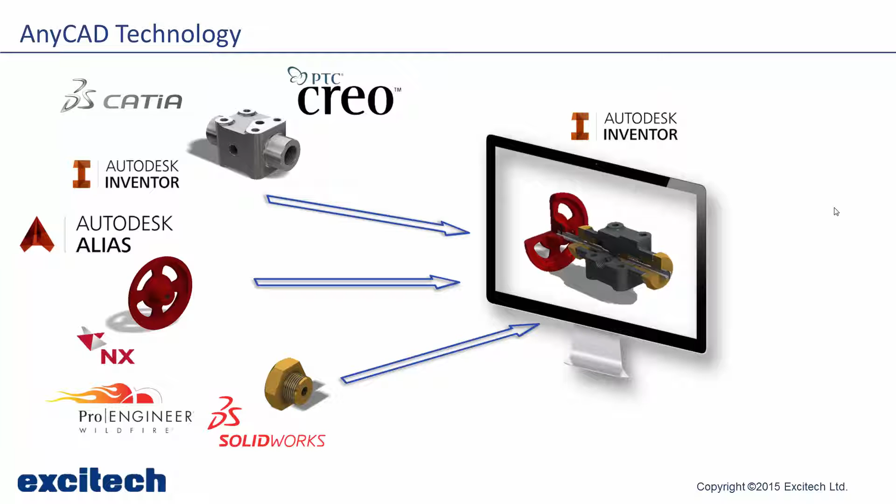So AnyCAD technology allows us to intelligently reference that data from the third-party MCAD tool directly into our Inventor assembly. If that component then changes, our Inventor assembly will update. Now, we've always had the ability to import data from some of these third-party MCAD tools, but it wouldn't, of course, have updated inside our Inventor session. So we now have that capability. And for the demonstration, I'll be using PTC Creo and Autodesk Inventor.

Okay, so here we are in Inventor 2016. Before we actually create a new assembly, let's take a minute to have a look at the new layout within our starting screen. This is now called the Inventor home screen, and you'll see it's split into three areas. We have the ability to create basic new templates on the left-hand side here. I could switch that to advanced quite easily with the little arrow here. All these panels are resizable as well, which is quite nice. We can also flip the arrangement of those panels.

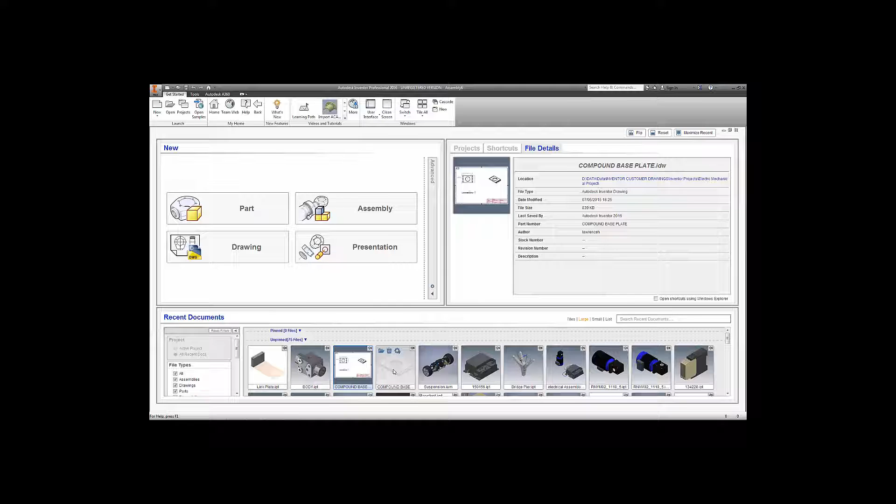On the right hand side here I have access to all of my projects, so I can make the projects active via here and also review the properties of these and actually add shortcuts into the projects. Something I really like is the ability to see the file details here of the selected component in the list here. That's quite nice, just to identify what folder path it's in, whereabouts it's actually saved within my system as well, which is quite good.

We can also maximise the recent file list, and you can see here we have all these recent documents as thumbnails being shown at the moment. We have the ability to pin some of these components as well, so if I start to pin them you can see it then keeps these in the pinned area here, and very much like a little folder system you can unpin, pin, roll these up and down and also filter information as well.

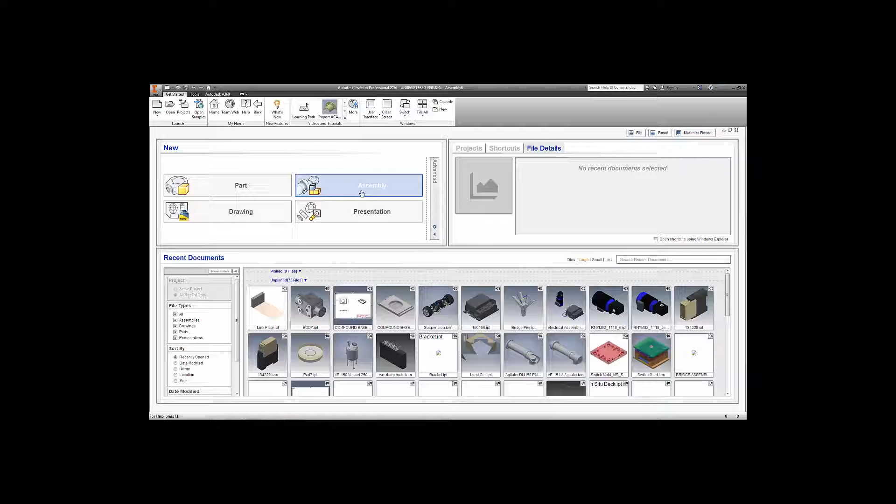Okay, so let's go ahead and create a new assembly. In this example we're going to place an imported CAD file in. So let's go and pick our Creo part and open this up. Now the new function here is of course the ability to reference the model through rather than convert the model. So I'm going to use reference here. I'm going to tell Inventor only to bring the solids through, and of course we can change our units in here. So I'll just say from source.

Okay, and that data is now referenced in. So here we have our Creo component. On the left hand side here you can see that if I right mouse click over the part I could edit the import, suppress the link which would stop it updating, or in fact break the link.

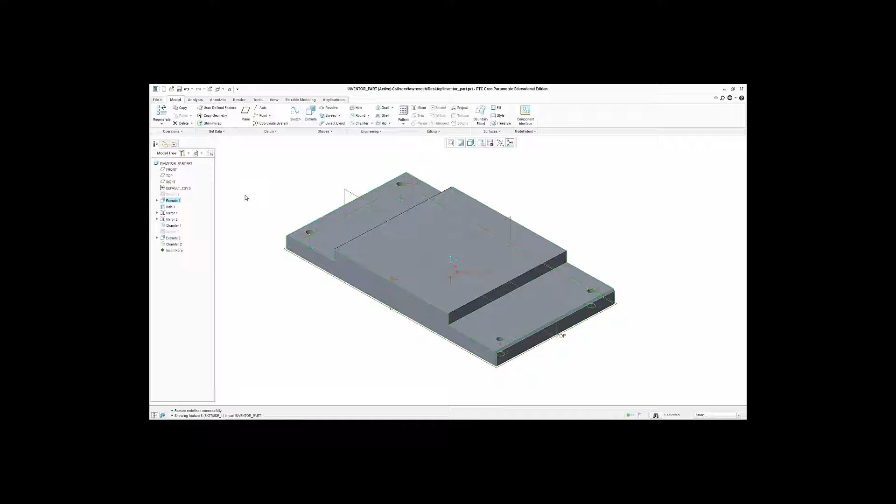Okay, so let's now go into Creo here, PTC Creo, and we'll make some changes. So we'll start by changing the extrusion height. Perhaps we'll just change it to there, say for example. Let's also change the width as well. So perhaps we'll reduce that to 250 there. Okay, we'll regenerate the component and save it.

So back in Inventor, let's see what's happened. Well, you can see I've got a strike of lightning across my PTC Creo part. That means it needs updating. So let's click the update button, and you can now see that Inventor simply updates that and references in the newly saved component. Okay, what about if I build some Inventor geometry off of this?

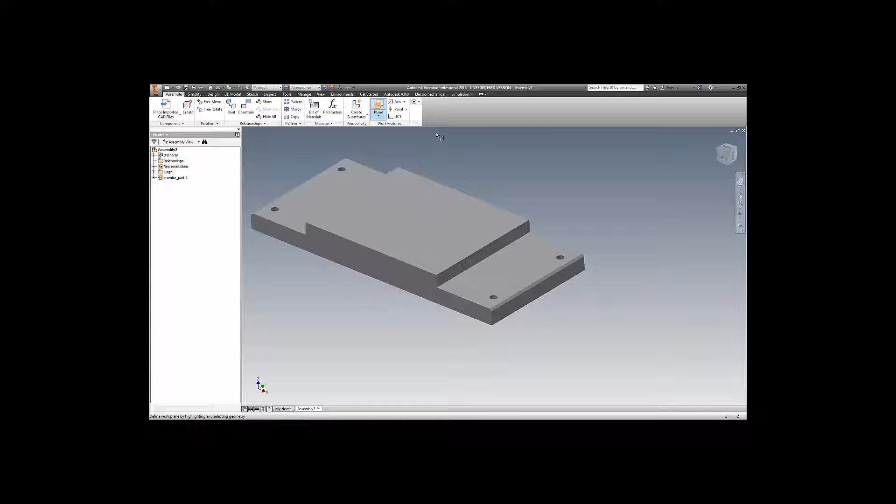So what I'm going to do now is build a work plane from it. So we'll have a work plane that's constrained to those two flat faces there, and we'll go through the process again. So let's go back into my Creo component in here. Once again, we'll edit the extrusion on this.

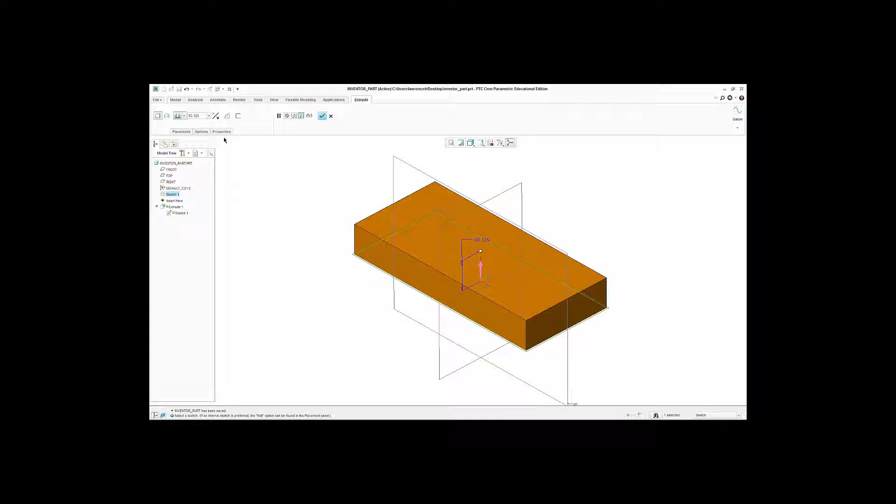We'll regenerate the model and we'll save it. Back to Inventor here and update. And of course you can now see that the work plane is updated as well. Now of course the significance behind that is if I then choose to build new features off of that work plane, those features will move as well.

So we can have a very intelligent system here where we can at will reference CAD data from other third-party MCAD solutions such as CATIA, SolidWorks, Siemens NX, ProEngineer, bring them into Inventor and then build my components off of that.

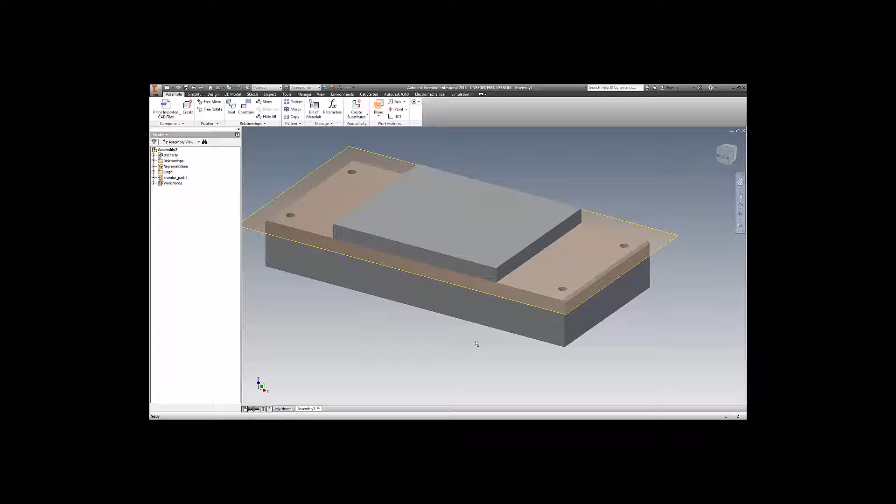How we've done this is we've actually associatively linked that DWG file into an IPT file, and then perhaps just use commands such as revolve, hole, sweep and so on to create the component. If we go back and change that DWG file by simply perhaps stretching or moving geometry and save that, then that would invoke an update within Inventor, and then our component will dynamically update. Okay, so let's now take a look at that in the software itself.

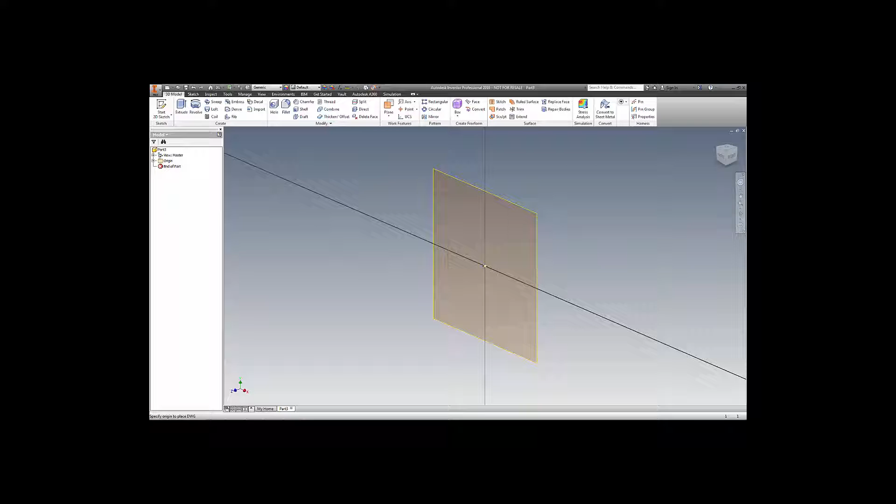So here I am inside Inventor, and I'm going to start by creating a new parts file. In here I'll go to import, and you can see we have a DWG file here, so I'll go ahead and open this up and I'll place this onto the XY plane and just choose my origin. Okay, so you can now see the dialog here is telling us that this is going to create an associative underlay, and if I want to make use of the geometry I can project it.

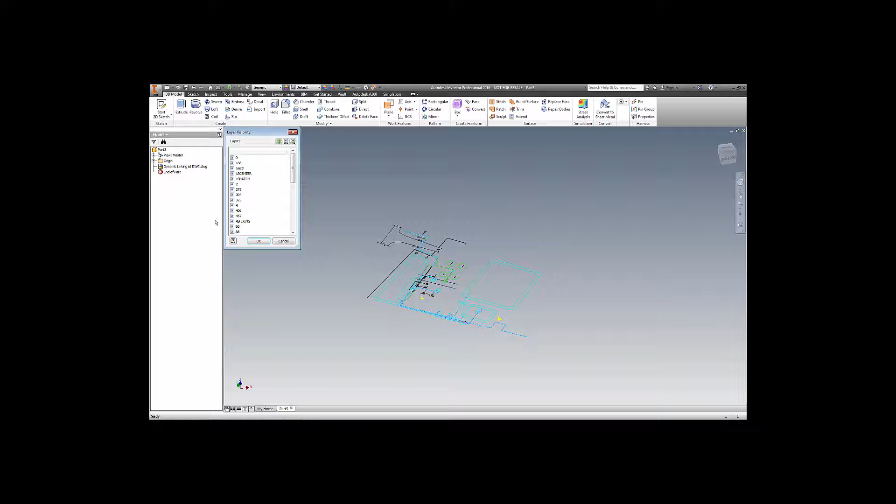If we take a look at the browser here, you'll notice that we have the DWG file linked in there, and if I right mouse over it, you'll notice here I could suppress the link, I could break the link, or indeed I could control the layer visibilities if I wanted to adjust the layers. So in this case I'm going to make use of a new tool that enables me to project the data through. So you'll notice up here we have a completely new command called project DWG geometry. In this case I'm just going to project off the circles that are representing the vessels.

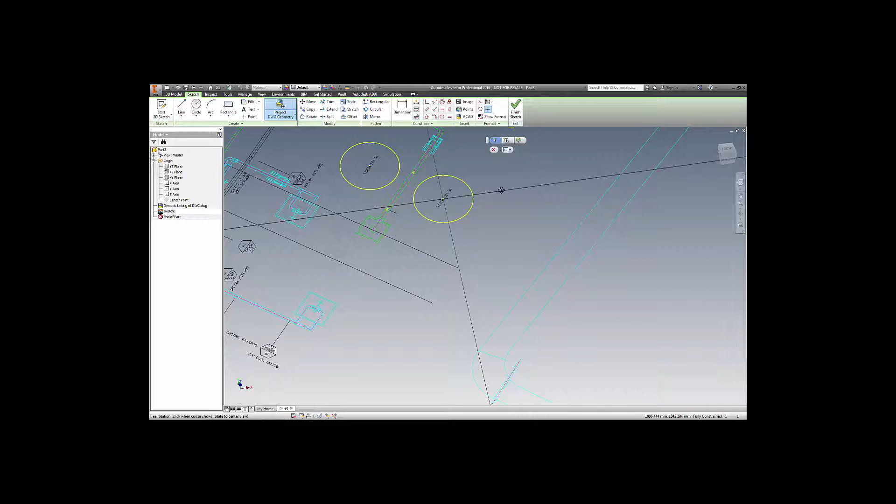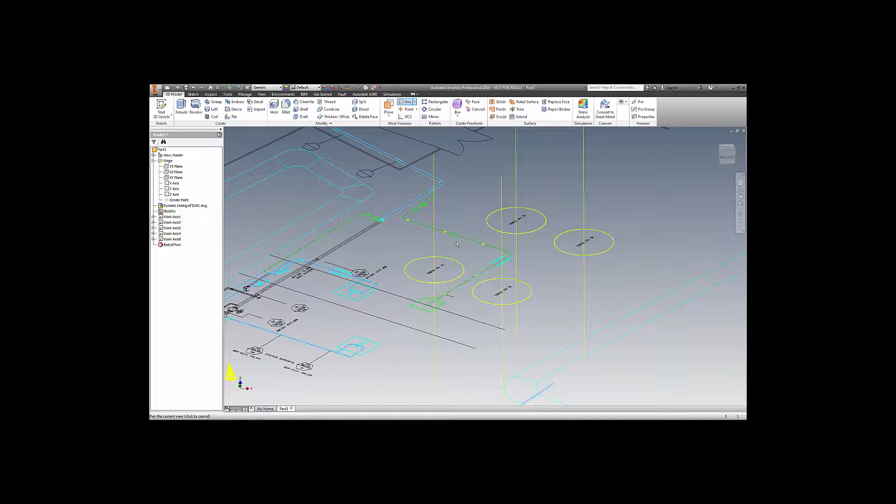We'll now create some work axes through here as well. So I'm just going to associate these back to the XY plane in here. Yeah, we'll go through and create those work axes. Okay. Right, so at this point we'll save the drawing away. So let's click on save. Okay, and this one's going to be called vessel layout.

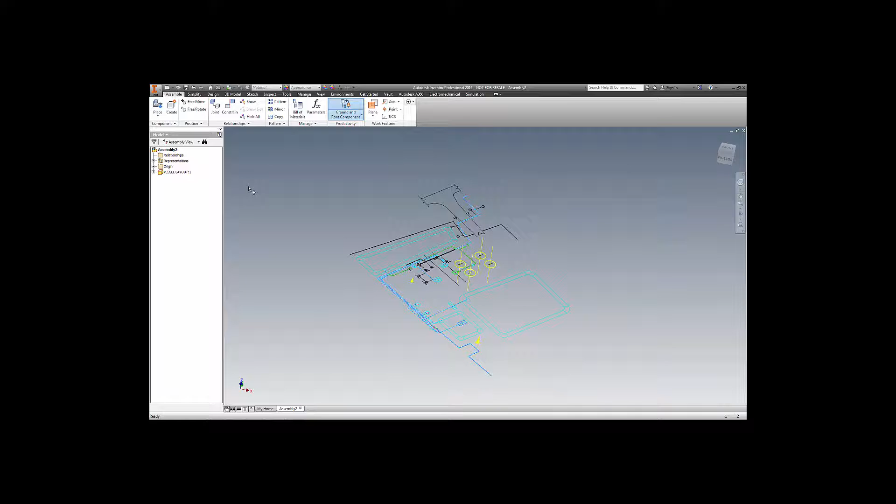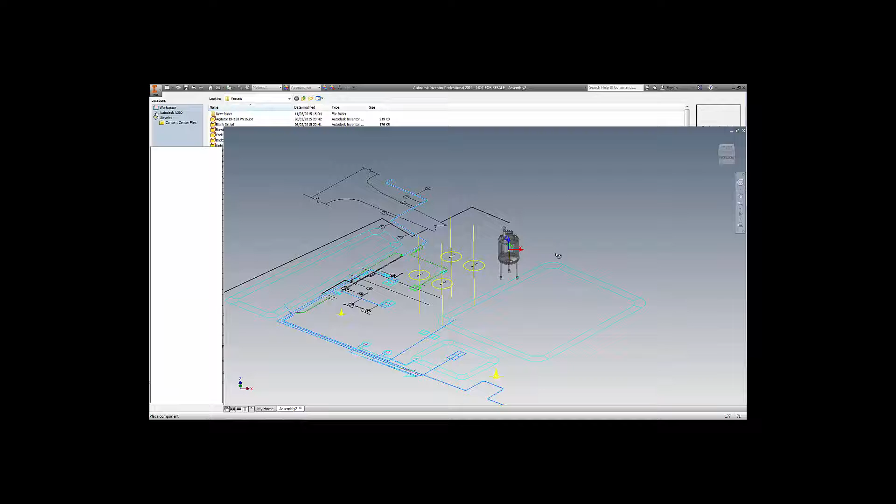Okay, so now we'll generate a new assembly file and we'll place in the data that we require. Let's just come up a few levels here. So there we are, a vessel layout. Okay, we'll place the part in and I'm going to ground and root this. So at this point, let's now go ahead and place my assemblies in. Okay, so what we need for these layouts here is basically the vessel, and we'll bring this data in. Okay, we'll just drop 4 of them around there.

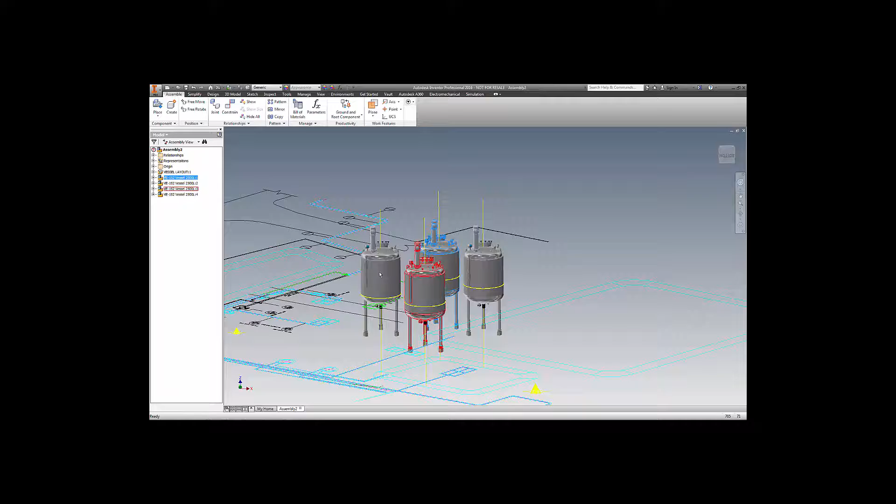Now what I'm going to do is constrain these to the work axes. So we'll just go around and constrain all these vessels in here. I'm not going to worry too much about the vertical placement. Just for this demonstration we're going to look at literally just a physical placement of these in relation to the DWG file. So maybe that's the vertical height for those.

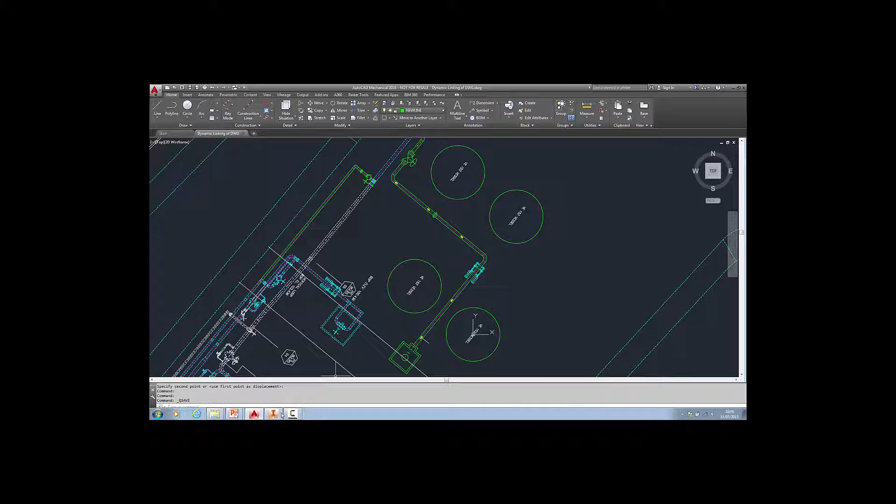If I go back to the AutoCAD file again, and once again move these vessels back to a slightly different location, like so, hit save, back into Inventor, you'll notice we get the strike of lightning, very much like we just saw with AnyCAD, and then of course I could update this here. Click on the return button and instantly that updates my assembly.

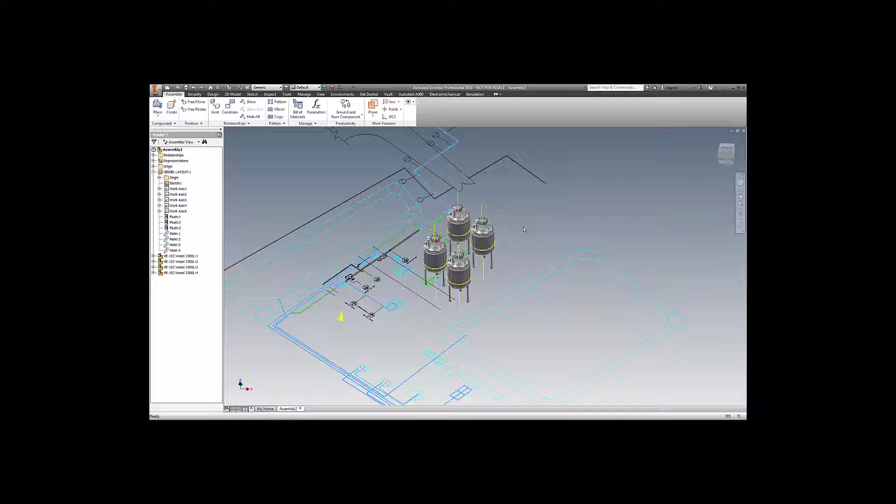So as well as driving component models with this, I see a much bigger use for this with creating assemblies. So what we'll be able to do is use a flat AutoCAD drawing as an underlay and have that linked to our physical Inventor components.

Okay, let's now move into the drawing view enhancements. So we have a few new enhancements here. First thing we're going to look at is the drawing views dialog box and the dynamic way that we can now move and scale views and also orientate views to place down onto a drawing. We'll also look at some of the new symbology that we can use whilst editing a dimension or creating text within an IDW file. And lastly, we'll look at the revised ballooning tools.

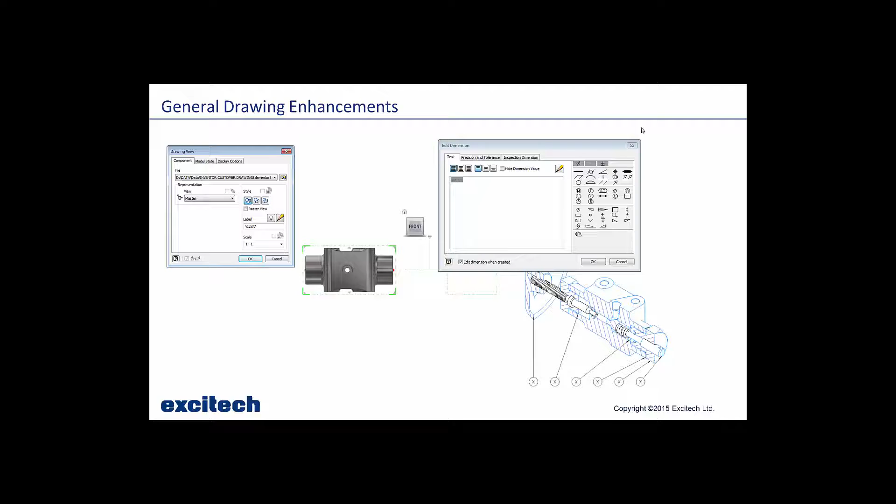So let's go into the product itself. And you can see we have an assembly of a valve inside here. And we'll go directly now into creating a drawing of this. Okay, so if we now click on the base command, first thing you'll notice is that we have a frame around the view, and this has dynamic glyphs on it. So I can use this to drag the scale, and it's snapping to default scales.

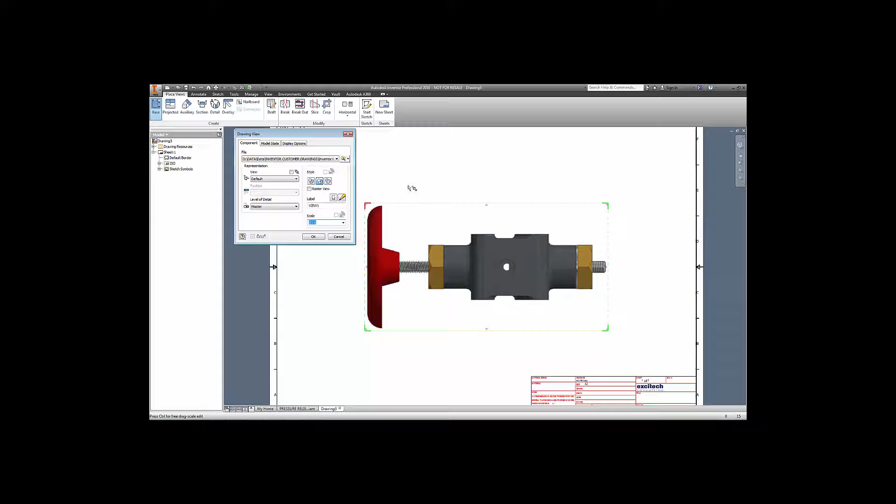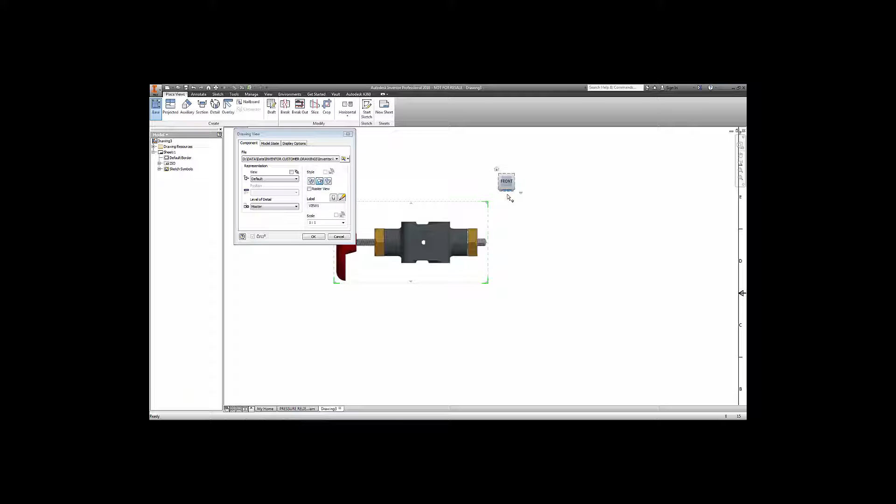We can also use this to project views. So as I move my mouse over here, you can see that Inventor is going to project a view directly above that view that I've got at the moment or below. We can also use it to move the view around just by dragging. Now, the other thing you'll notice up here is that I have the ability to use the view cube whilst creating these views. So for example here, if I wanted a plan view over the top, it's nice and easy to use the view cube to get that orientation.

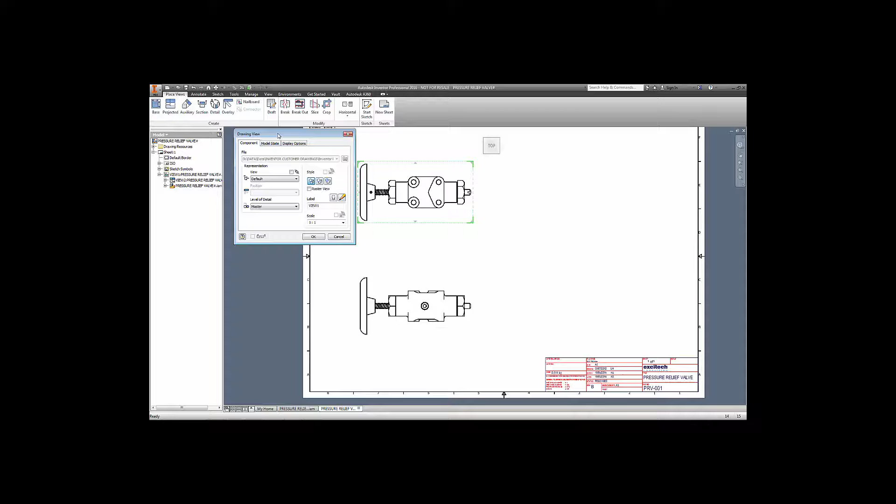So let's go ahead and place a couple of views out. There we have it. And what we'll do here is we'll also create hidden detail lines in here. Notice we have new icons in here, so this box has had a little bit of a makeover as well, which is good. Okay, and what we'll now do is we'll create a new base view up here, which is going to be an isometric view. Okay, so there it is, and again I can scale that quite nicely through here and place that where I want.

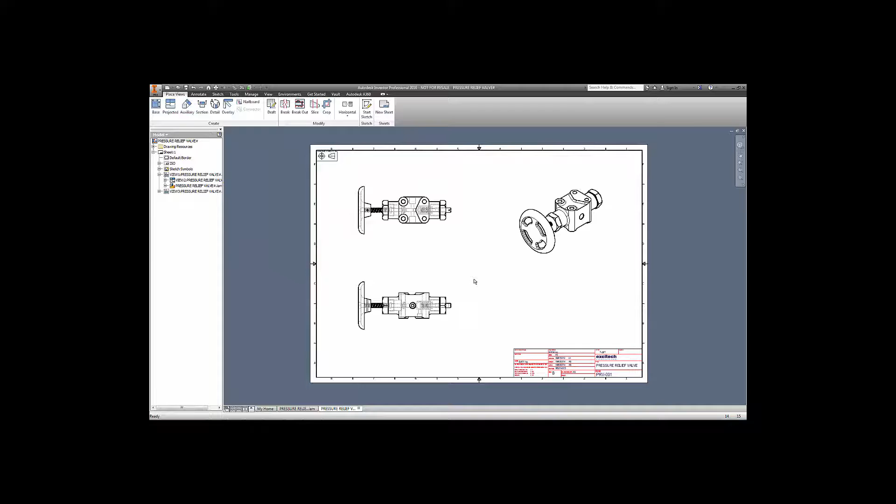Okay, so let's now have a look at some text improvements. So if I get an overall dimension across this, from there to there for example, as I place the dimension down, you can see that we have many more symbols that we can now make use of.

We'll also now have a look at the revised ballooning routines as well. So first up, I'm going to create a parts list that we'll place down onto the drawing. And now we'll create some balloons. So if I go to the auto balloon option here, one of the things to look out for here is you'll notice that we can now use our own user-defined symbols for balloons. That's quite a nice option.

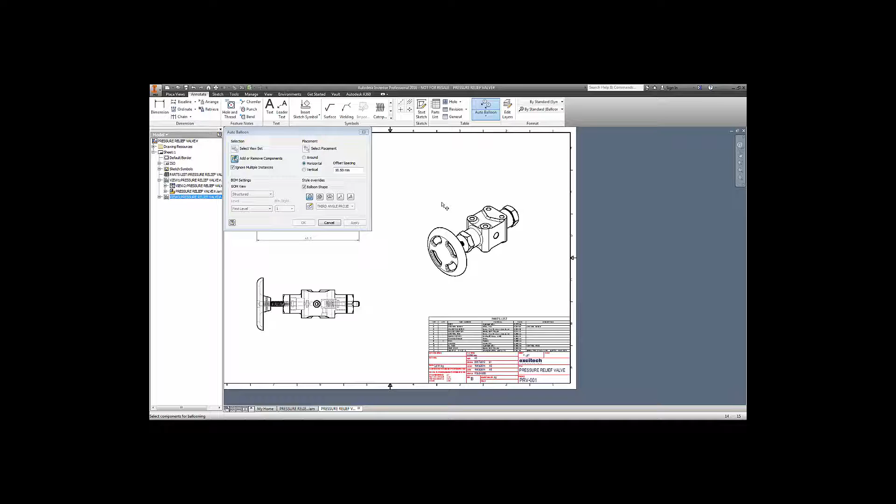Also, you'll see here that if I select this view and all the components within it, and now ask Inventor to place out some horizontal balloons, what it's going to do here is try and find the closest point on each component as a reference. In previous releases you might have found that the reference arrow here went all the way through to the back edge of the part. So that's quite nice. Okay.

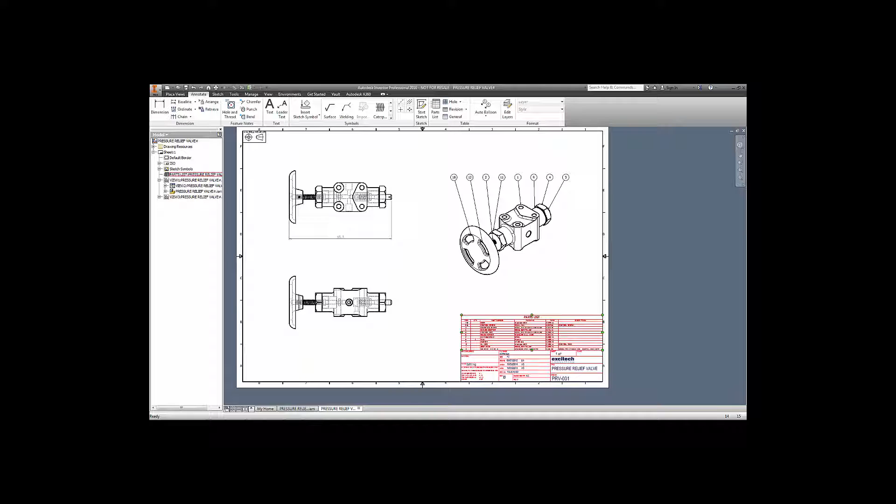Let's now take a look at some freeform modelling. In this section we're going to just take a small look at some of the enhancements made to the freeform shape creation. So for this example I'm going to create a new chair back and also a new chair seat. We'll see here that Autodesk have completely revamped the ribbon across the top here, and you can see that we have many more panels on there and quite a few new commands. So the best thing to do is just get in and start to show you that in action.

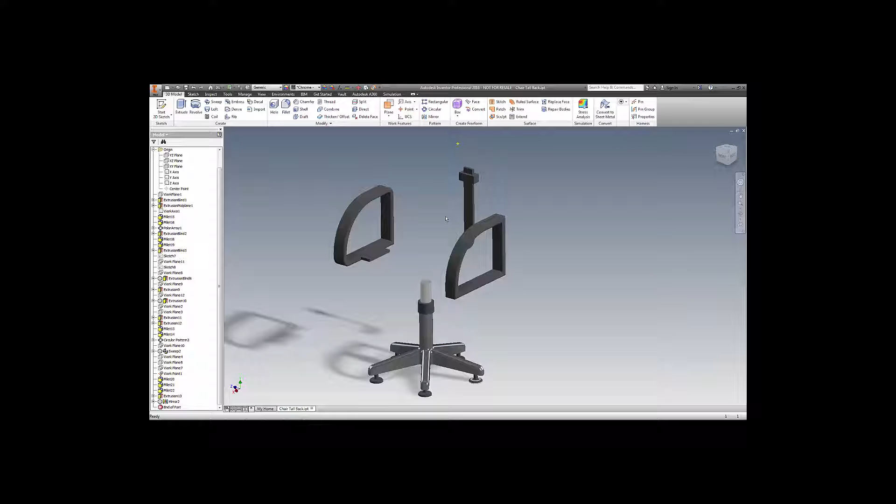So here we are inside Inventor, and you'll notice I have some basic components of the chair modelled. What I want to do now is just start to explore some basic ideas for a seat for the chair and also a back. So here I'm going to start with the box command. I'll pick a location where I want this to start and just place a box down.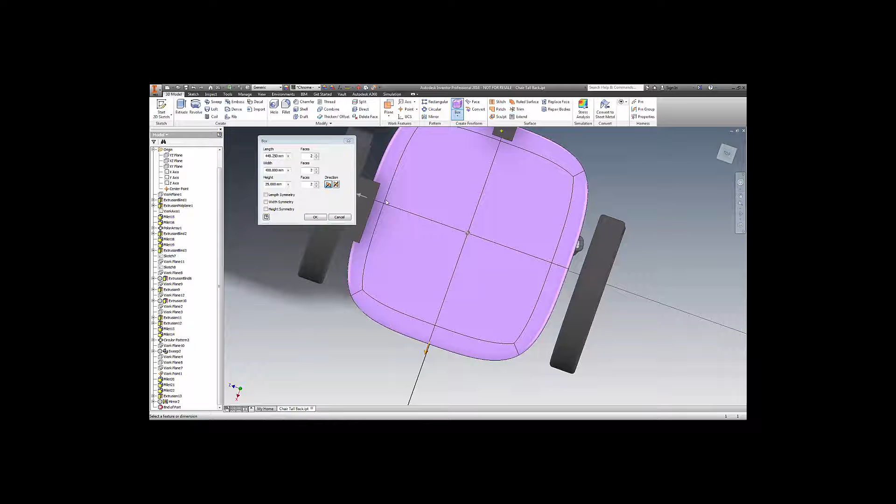Now at this point I can just start to stretch this data around just to get a rough idea of the concept. So that's a little bit too big, so we can stretch that back a little bit there. I'm quite happy with the width of that. So let's now stretch up the height.

Okay, we'll go a little bit more than that. Okay, that looks fairly good. So we can now increase perhaps the face count a little bit here. And we can also put on some symmetry. So here I'm asking for width symmetry.

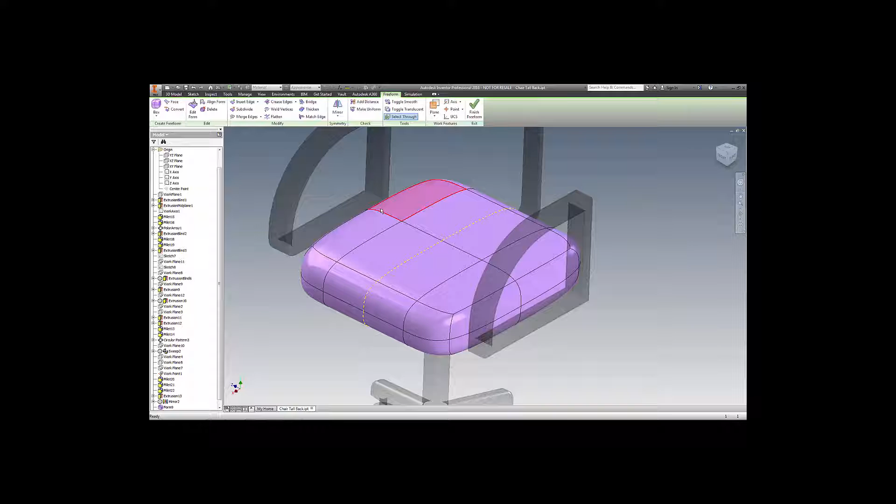Right, so at this point we can now start to edit the form. So in this example, you'll notice here we have various different filters to allow me to pick points, edges and so on. So I'm going to pick an edge here. Notice I only have to pick one side because I've selected symmetry across the centre of this. And of course now we can start to pull this around.

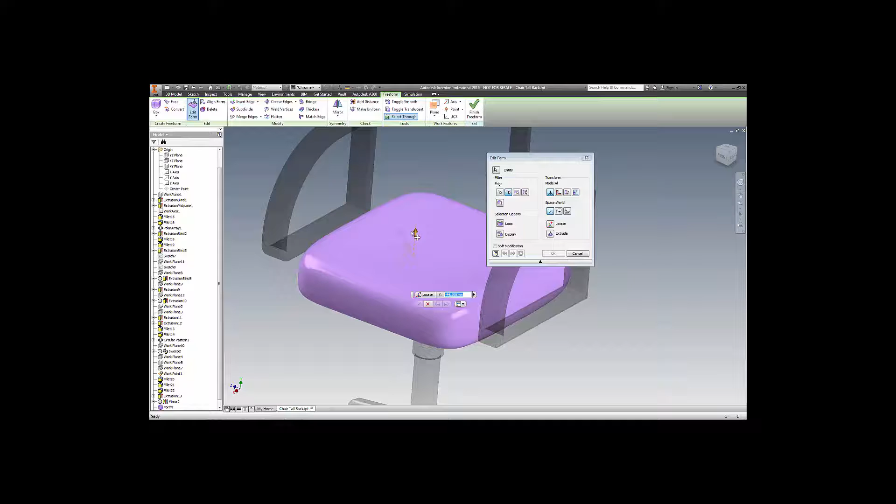So let's have a slight depression into the seat there. And what I'm going to do is angle that depression back. So you can see as I pull the rotation around, what that's actually doing is rotating that edge there. Now, probably to be a little bit more successful than that, what I'd probably rather do is perhaps pick the pad faces themselves. Now, to do that, I'll probably want to subdivide these a little bit further.

So I can go to the subdivide command. Yeah, we'll pick a face there, and also we'll subdivide this face here. Good. So now we'll select these two faces here, and again we'll go back to edit form and we'll pull this down just as we did before.

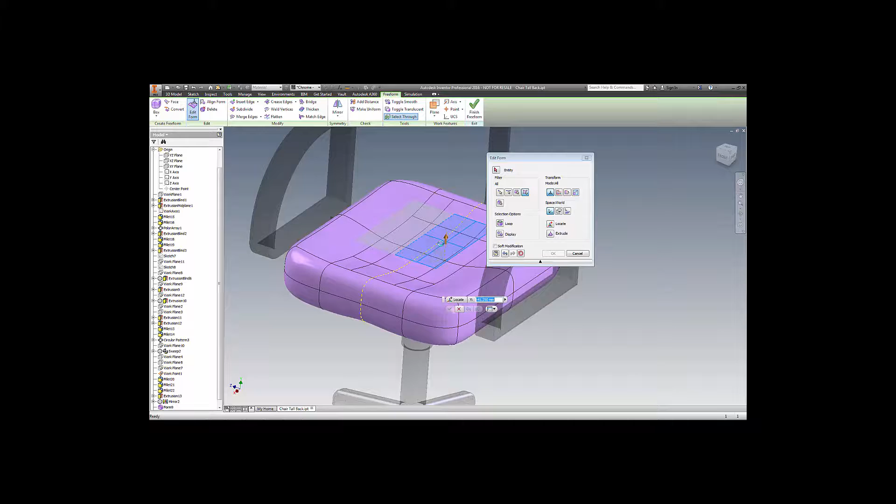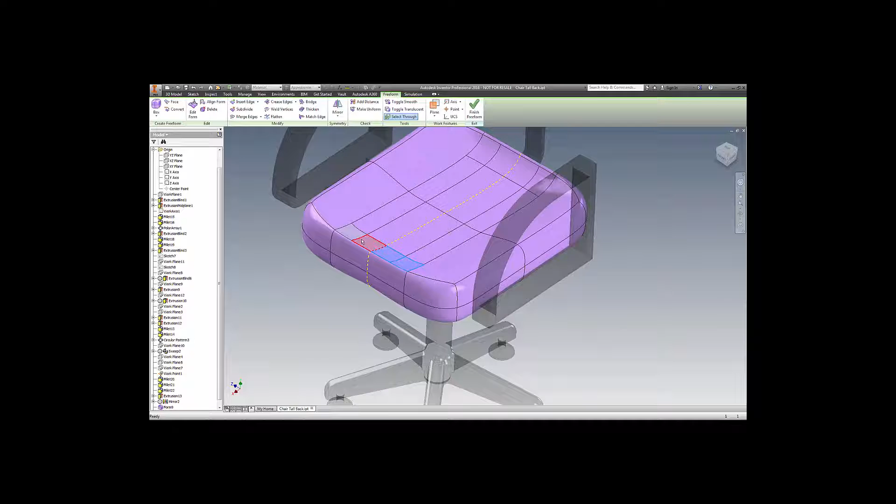Now this time what I better do is rotate. So you can now see I can rotate that around. Yep, let's just get that looking about right there. So we're going to have a nice sort of deep seat towards the back there, which is good. Okay, now we'll make sure that we have a nice area for our sort of legs to fall through.

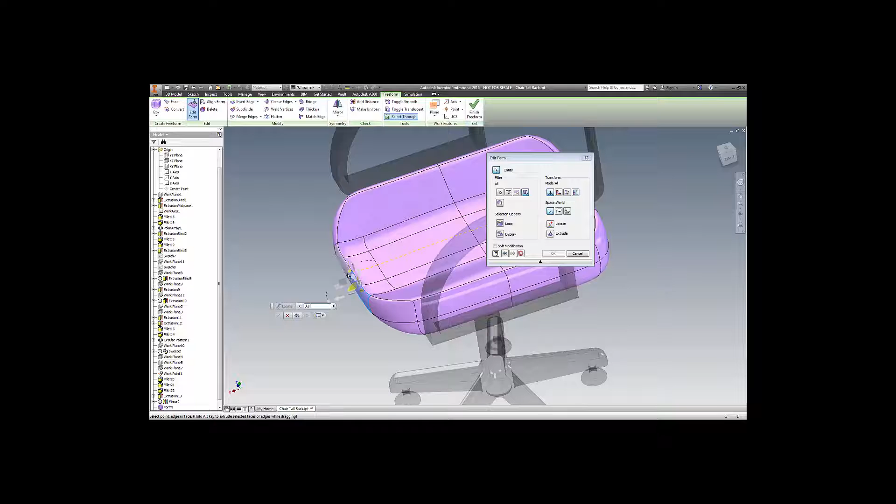So again, we can edit the form here. Yeah, we'll just slender that down a little bit there. And perhaps what I'll do here is I'll just extend that out just a little bit in there. Let's pull that a little bit further there. So you can see this is all very conceptual at the moment.

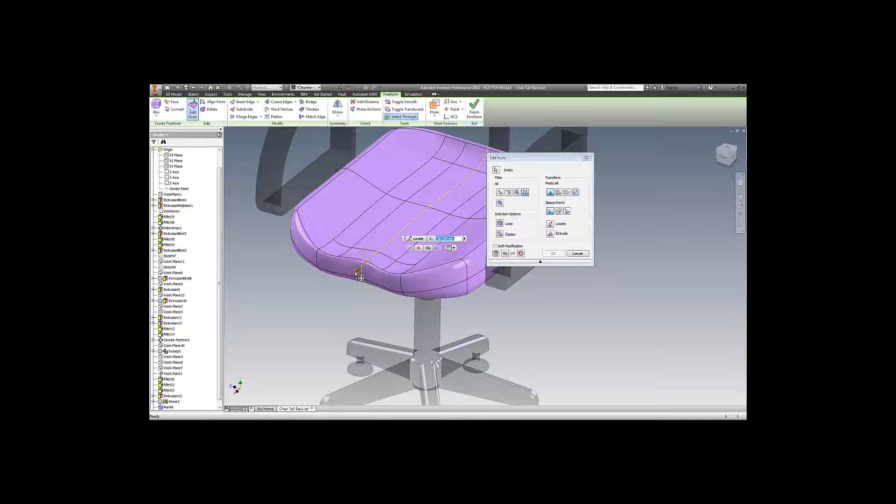Okay, now what I'm going to do is, again, just edit this edge back a little bit here. And we'll take both of those edges there. And we'll push that somewhere like that. Okay, so fairly happy with that at the moment. Again, we can come back and fine tune that a bit later on. So we'll finish that form there.

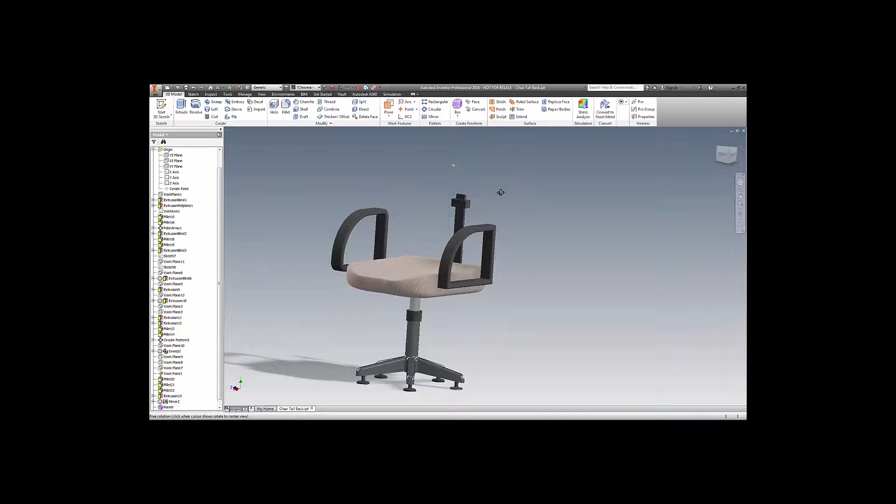And again, here we can assign a material to this. So let's go through and make that chair, for example. Okay, so there's the seat for the chair itself. So let's now go and create the back of the chair as well. So again, we'll start off with the box command. We'll pick a position where we're going to start this.

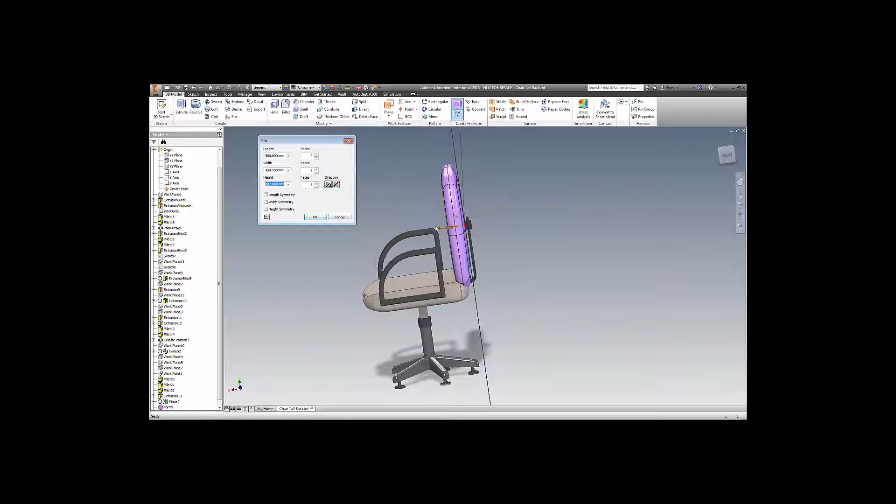And once again, I can start to just pull this geometry around to get a rough concept. Okay, so that's looking okay at the moment. Again, we'll create slightly more thickness to this. And once again, I would like some symmetry. Good, so there's our area ready to start.

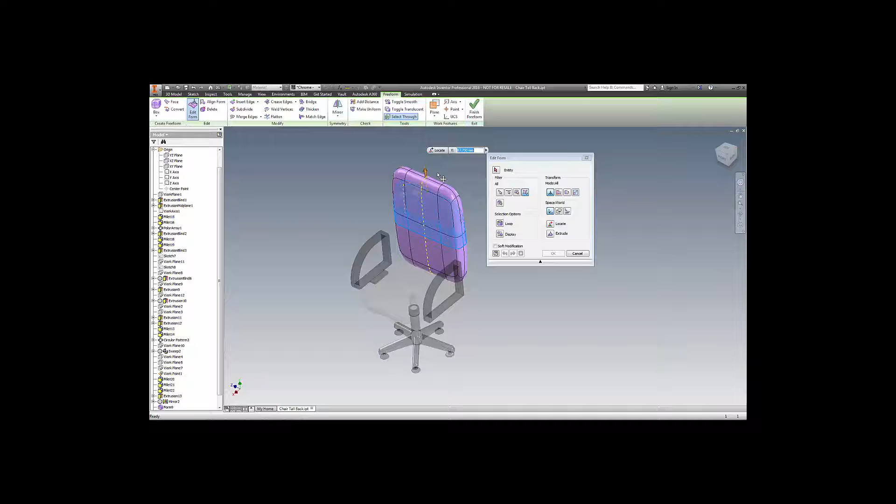So now what I'm going to do is just start to pull this around once again. So you can see now I've just been able to use a very simple window selection set there to pull that around. So we'll go for something like that. Here, what I might want to do is start to pull this around a little bit as well. So I'm going to have a little bit of an area where that's coming back there.

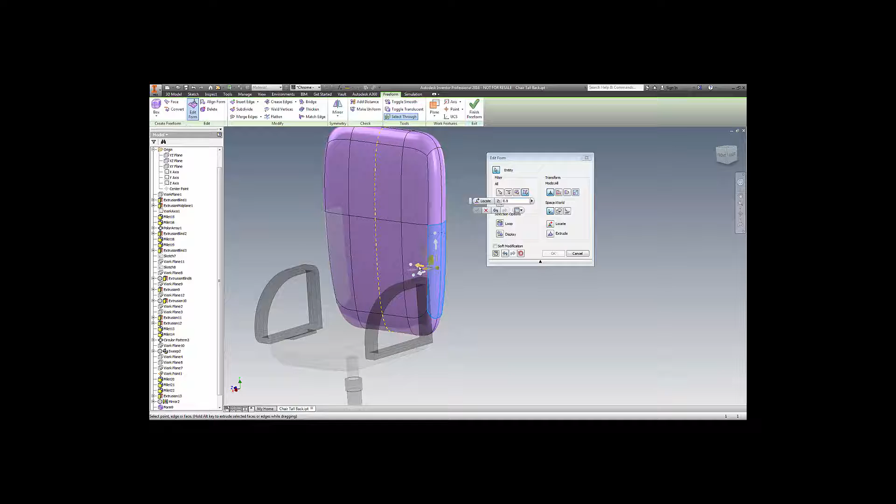Let's now come into here, pull that a little bit further like so, and then right down the bottom, let's just make sure we select the bottom faces there. We'll pull that back a little bit. Okay. Perhaps what we'll do is we'll increase the width of the chair up the top here a little bit as well. And we'll narrow it down to the bottom. Yeah, just squeeze that in a little bit.

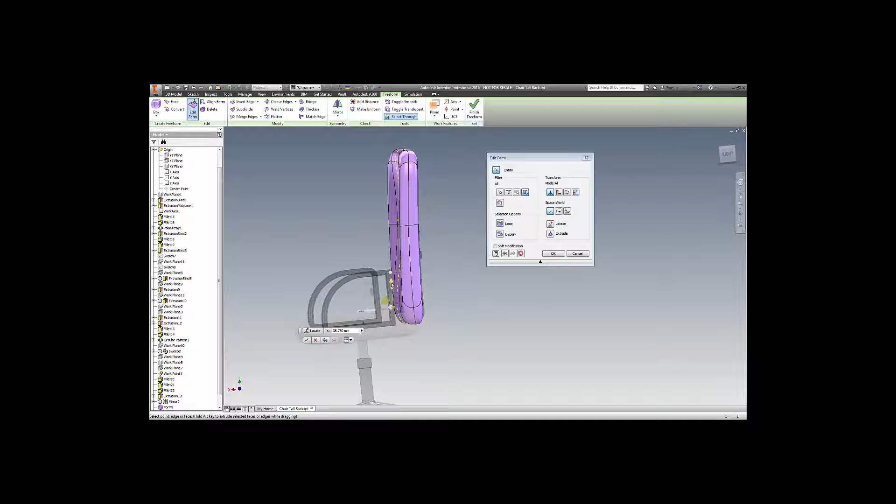Yeah, and we'll take these edges back in, perhaps like that, and these edges can come out to give us a bit of lumbar support. Okay, so again I can add my material to that. Yep, so this again will be the chair material there.

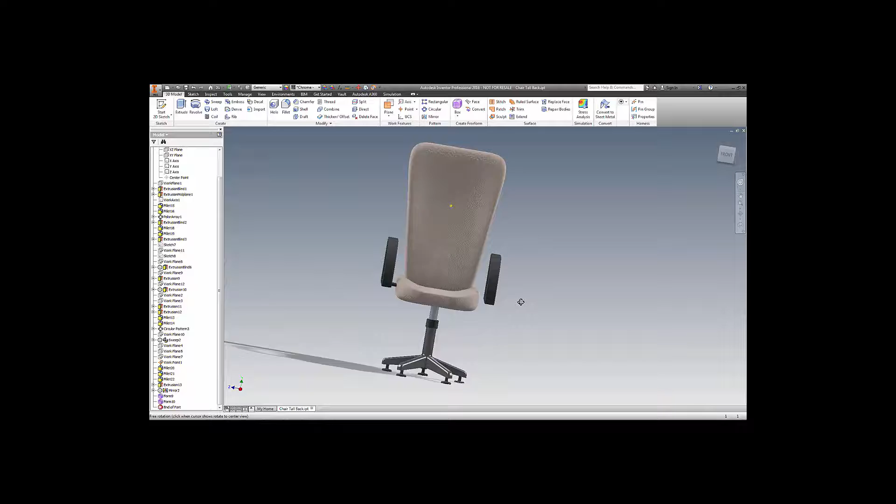Okay, now again at this point, if I look at that, I think, well, okay, the back is probably way too big. So of course we can go back and edit this very easily. So if we just do some edit freeform on here, we can go back to being able to reduce the height of that very simply, like that.

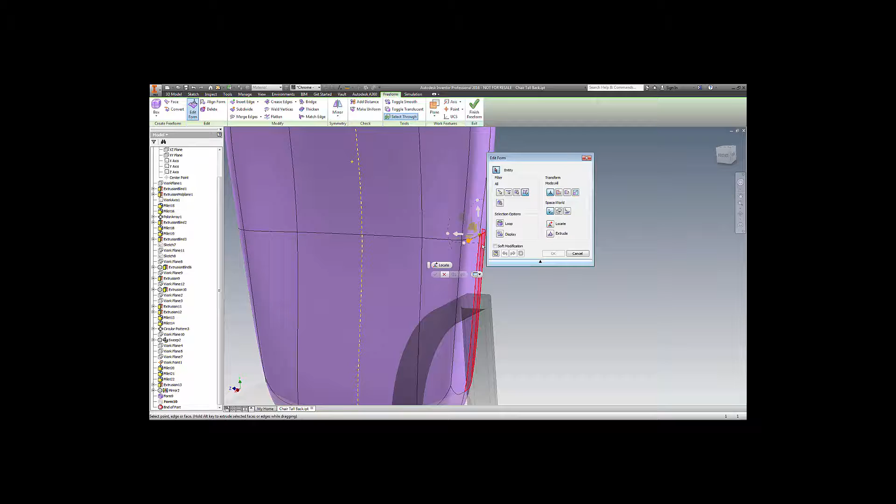Perhaps I want to pinch in these edges a little bit there as well. So what I'm going to do in this case is use the point there, just to pull that back in. Yep. And then perhaps we'll take the whole edge this time.

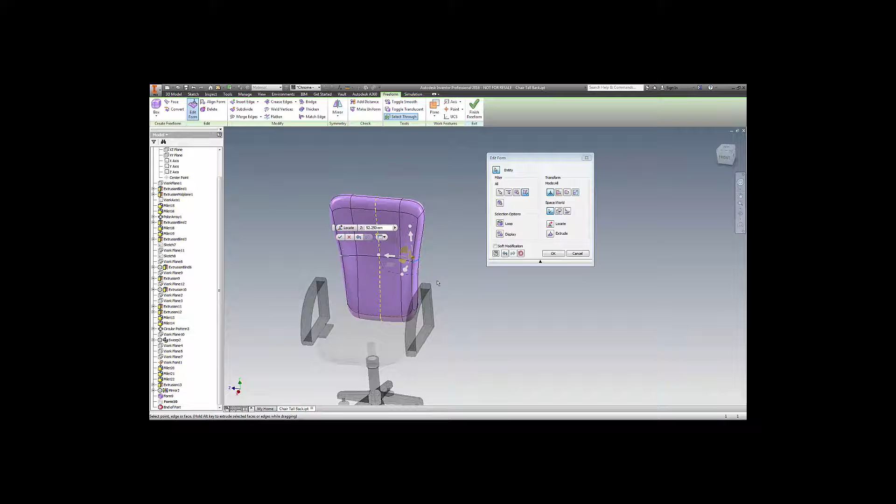So we'll select those two edges there, and again you can see I can squeeze that in. Now as we start to squeeze this, you'll notice also that we can have a soft modification in here as well. The sort of thing we can do here, it's very easy, just play around with these slider bars to get a much nicer blend between the components that I'm using there. Okay, so that looks quite nice.

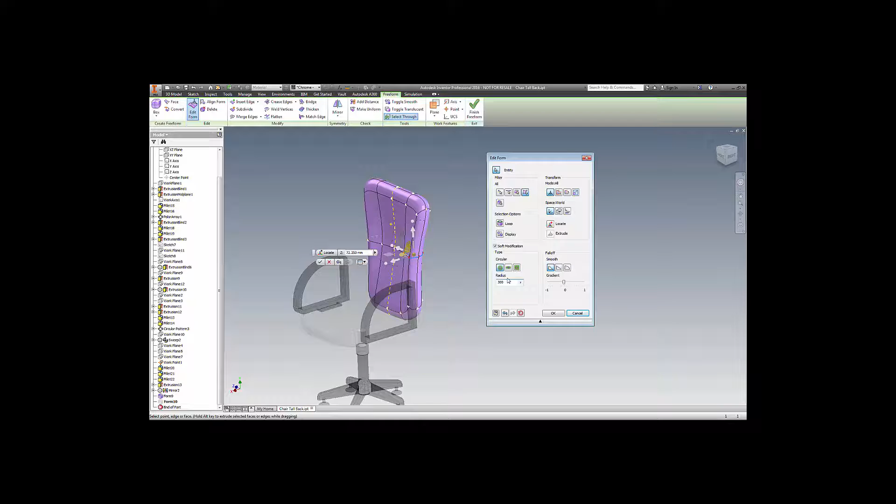Again, I could set an accurate radius in there if I wanted to, so perhaps we'll go for a slightly smaller radius in there. Yep, and we'll come out with that modelling tool. And there's my conceptual chair.

Okay, let's take a look at the sheet metal enhancements. There's been a few sheet metal improvements in this release. One of the major ones is the ability now to use multi-bodied solids within the sheet metal workflow.

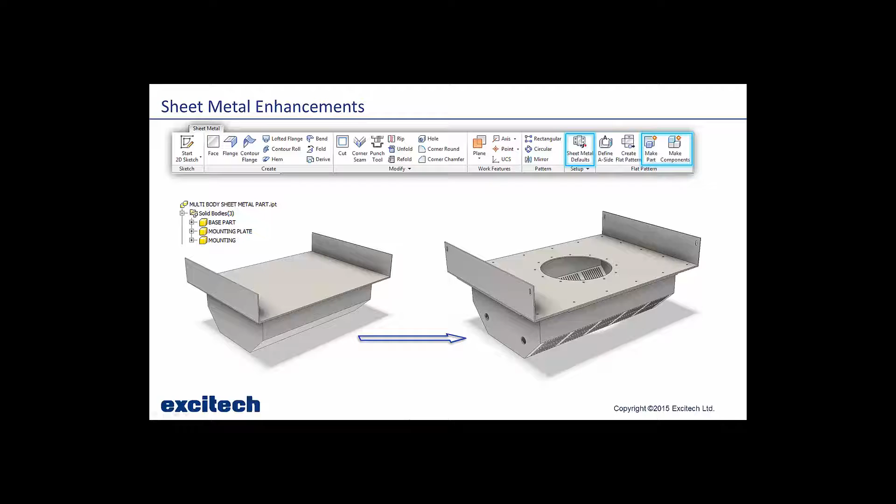Okay, so here we are in an IPT file. If we take a look on the left hand side of the browser here, we'll see that we have the multi-bodied solid and we have the 3 separate solids that I've created here. And if you look at the workflow, it's fairly straightforward, just solid modelling.

So the first stage here is to convert this into sheet metal. As soon as I pick this, you'll notice Inventor then invokes the sheet metal defaults command. So I can pick on any face here, and you'll notice now it actually pulls the thickness through from that particular selection.

So once I've done this, I can now start to process these components into sheet metal parts. So let's start with the mounting plate here. What I'm going to do is just turn the visibility of these components off. And we can now use traditional sheet metal tools to start to rip the corners out here, so we'll grab that corner there and rip that out, this one here.

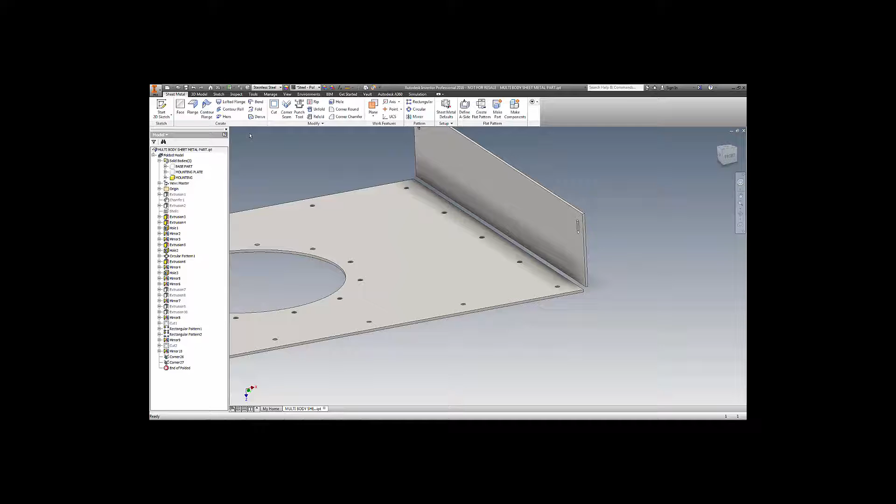Then we can put bends in as usual. So let's start with the flange here. Now another nice change is the ability to have a 0 bend radius, so that wasn't possible in older releases. So let's do a 0 bend radius in here. Okay, and there's my first component done.

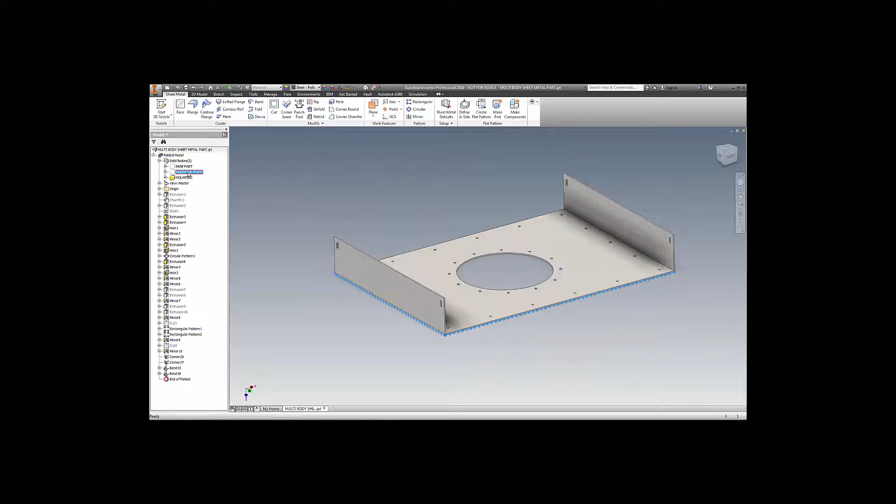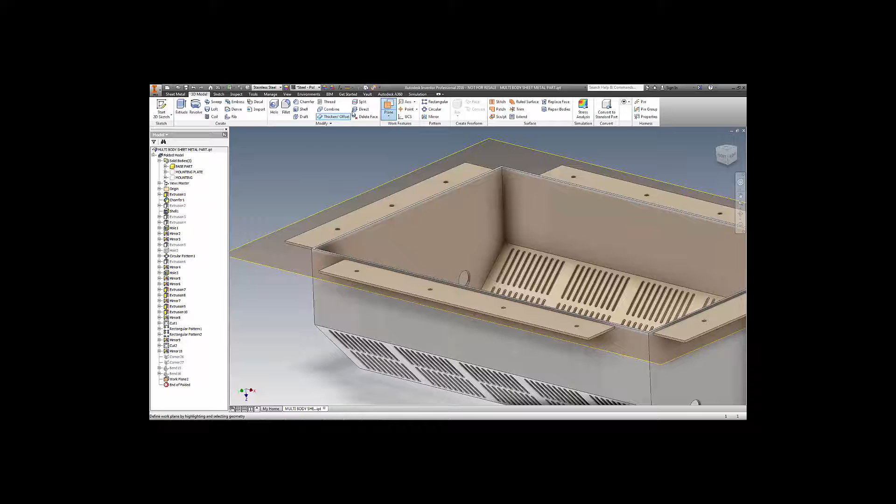So we'll now move into the next one. Let's go to perhaps the base part. Turn the visibility of this one on. Now in this case I'm probably going to need to get rid of this area here, so let's just use the split command for that. Yeah, we'll go ahead and split the solid in this example. Like so.

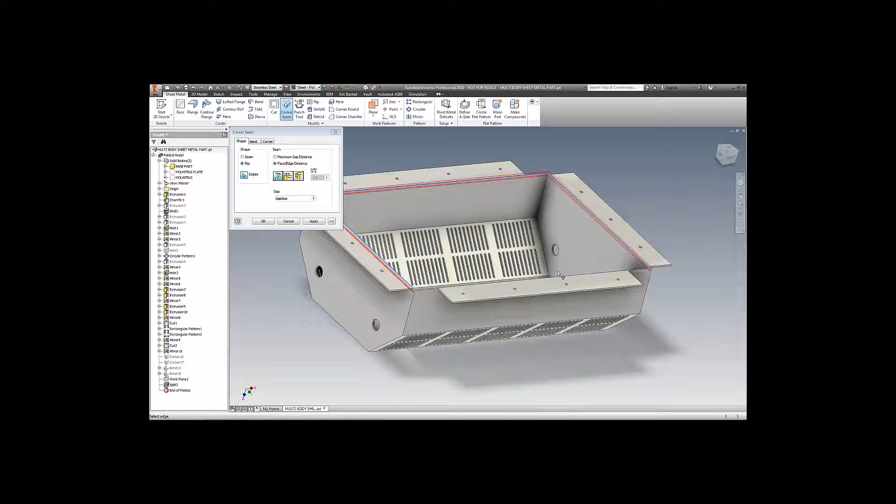And now once again we can start to tear out the corners, so we can use the rip feature here. Okay, and I'll just go around and rip out all these edges as well, and also the back edges here.

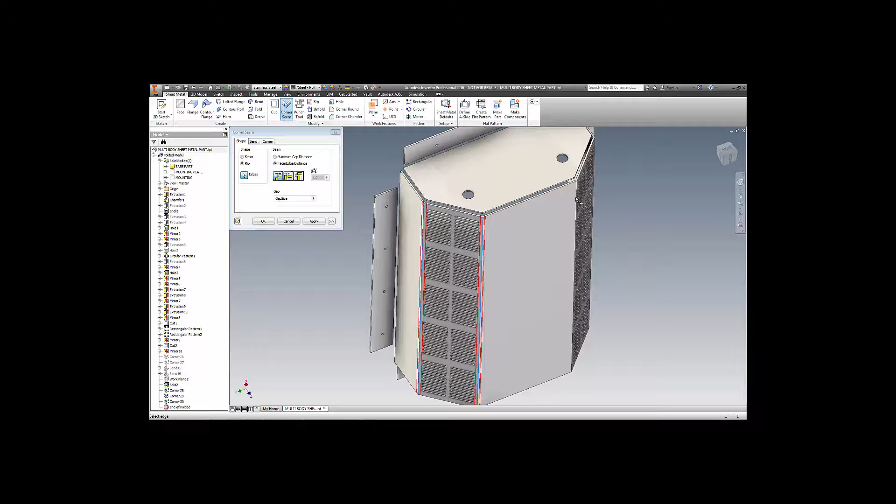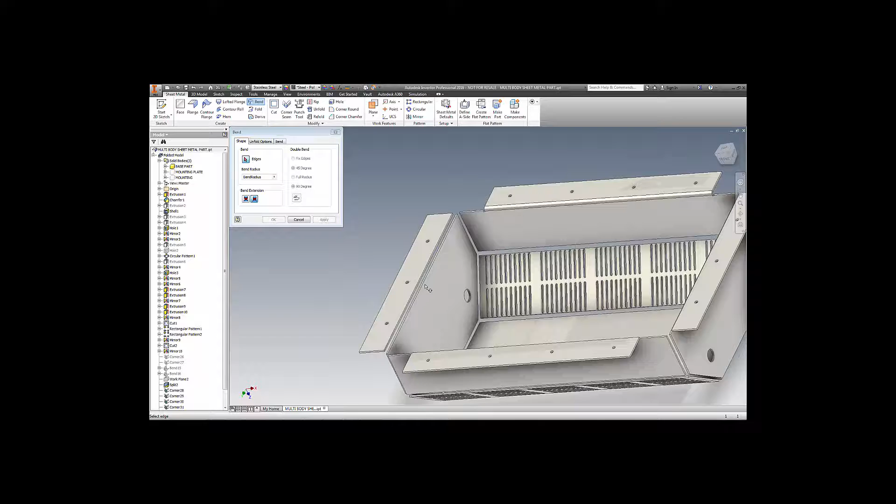Okay, so we can now start to get our bends in. Same process you've seen before, so we can select the components to put the bend in. I'll just do a couple more just to show you the full workflow, and then we'll create the finished assembly. So we'll get the final components inside here, like so.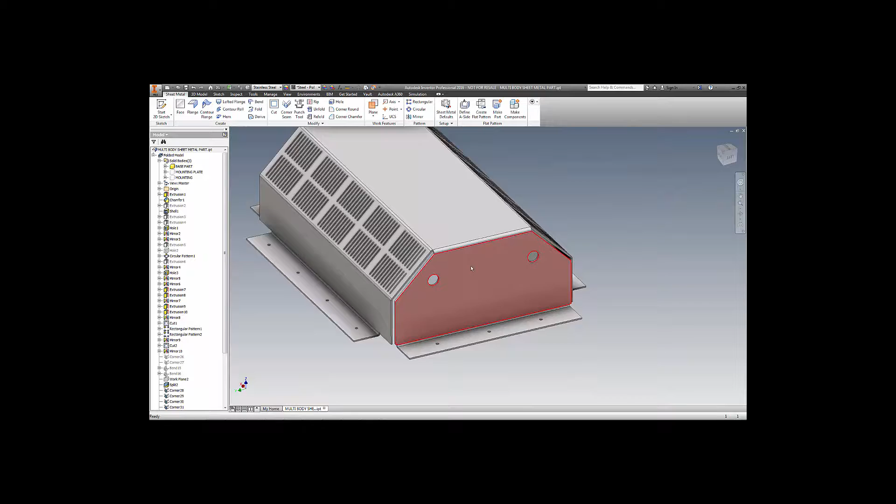Now once we've achieved that, what we can then do is go ahead and make components from these. So we can select our solids that we require in here. This is going to be the assembly that Inventor will create. Okay, and there's my finished assembly file.

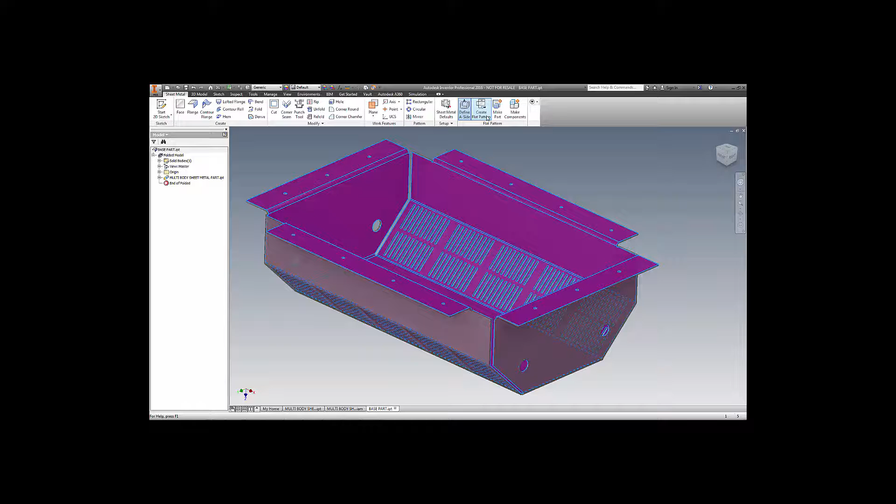Now one of the nice things now is, of course, I can open up the components here and then of course flatten these out. So let's just make sure we've got the A side defined, and then we'll flat pattern. Okay, and there's our flat pattern created.

Next, we'll move into additive manufacturing. This is a fairly new area for Autodesk. We've always had the ability to output a STL file from Inventor, but we haven't been able to interact with it - for example, choosing a machine, choosing a process that we're going to use for that, and also being able to orientate the part in relation to the machine's bed. Now, additive manufacturing isn't just covering three-dimensional printing, it's also looking at other processes such as extrusion and also things like sintering as well.

So let's now take a look at the process in a little bit more detail. You can see we have a new ribbon inside Inventor 2016, and this allows us first to choose our machine that we're going to use.

What we can then do is set the orientation of the product in relation to the machine's bed. If the part is too big to print in one go, or it makes sense to break the part down into smaller pieces, we can then partition the component. Inventor will then, for example, create things like pegs and holes to reassemble the components together after manufacture.

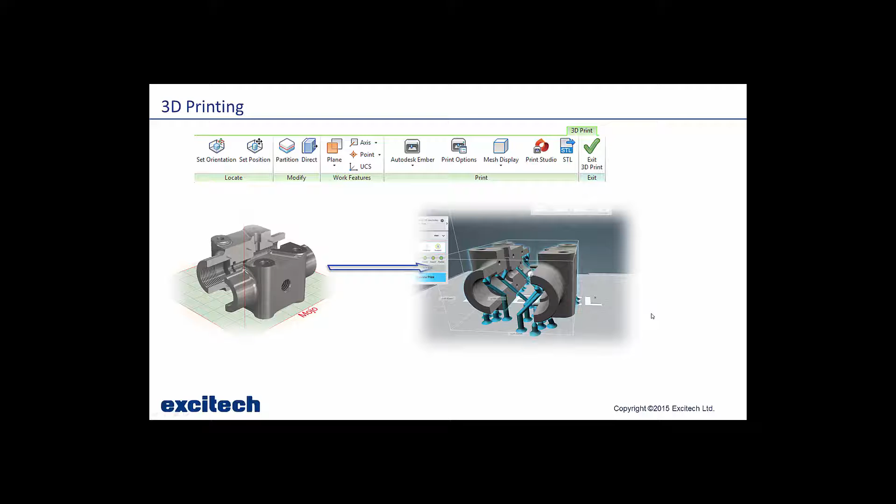And then we have the option of outputting it to 3D Print Studio. So let's now take a look at this process in the product itself.

So I have an IPT file open inside Inventor. First thing I'm going to do is go to the Environments ribbon, and you'll notice here that we can now go into the 3D Print environment.

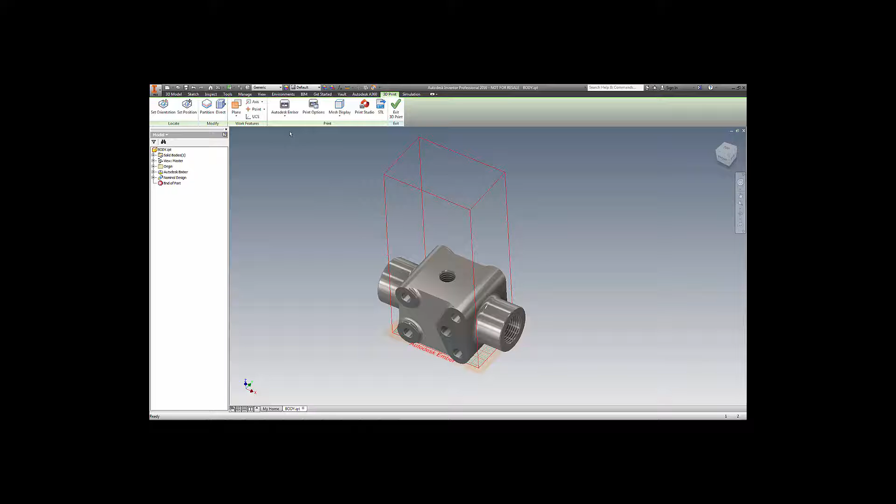Now, the first display I see here is basically the envelope of our machine. I can see that my component will not fit inside this particular machine, so I'm going to select a new printer for this. Perhaps we'll look at the Mojo, and you can see now we have a slightly bigger bed and a slightly bigger envelope.

The next thing I'm going to do is set the orientation for my component. So first we'll choose the face that I want to sit on the bed, which will be this face here.

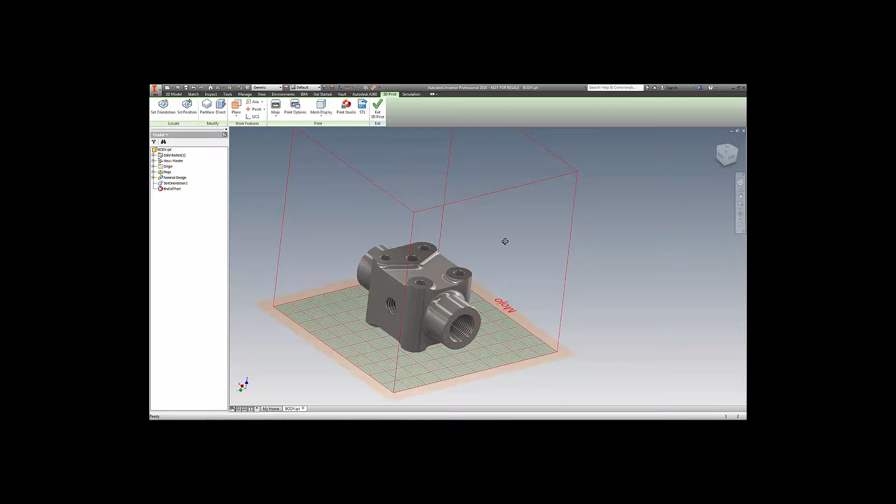Okay, and that's done. Now I'm going to split the part as well, so I'm going to create some geometry to help me define a work plane that I'm going to use to split. Then we can use the partition command, so we'll select the work plane that we're going to use to partition this.

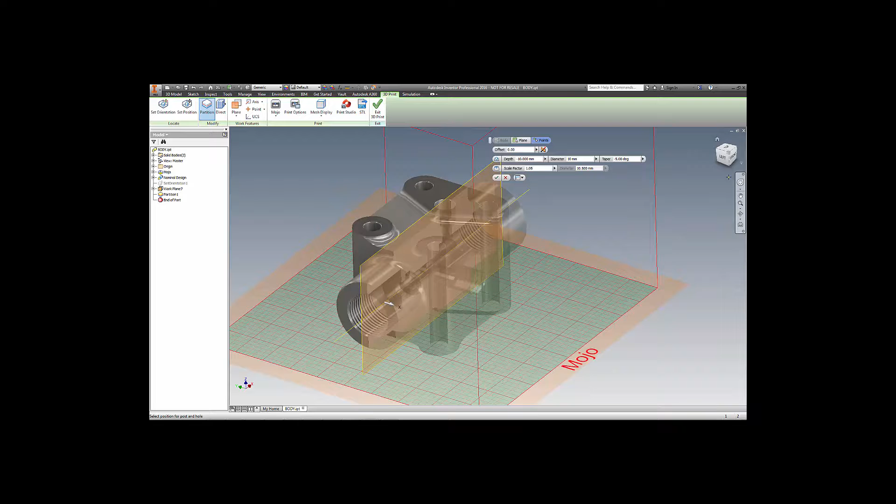And in this example we can now start to create our pegs. So I'm going to choose the peg diameter that I want to run with here, and also the peg depth.

And now in here we can start to position our pegs. So let's have a peg here, another one down here. Now I'm just at random picking positions that I think the pegs need to go in, but actually you can place these a little bit more accurately if you want by editing the sketch afterwards.

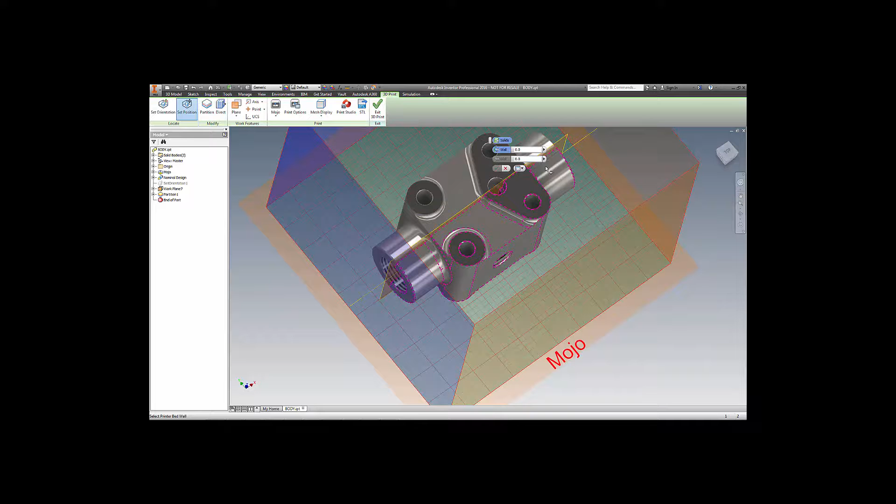Okay, that's good for me so far, so we'll create those pegs. Now in this example, what we'll now be able to do is reposition these components. So what I'm going to do here is start by picking this wall here, the side wall, and this side wall here.

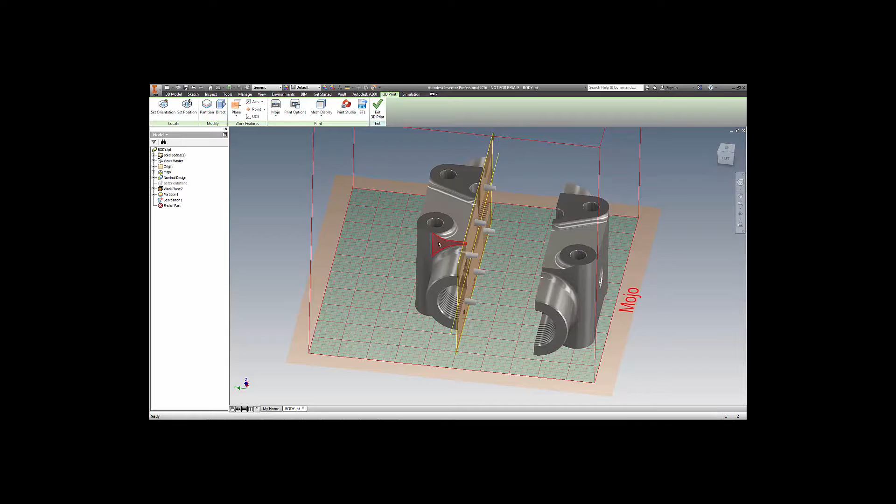So I'm giving myself a 5mm envelope to the side of the machine itself, and you can see Inventor's now setting that envelope for me. Okay, I'll leave this one where it is for the minute, but you can now see that we've had our pegs and our holes modelled to allow us to reassemble this part after manufacture.

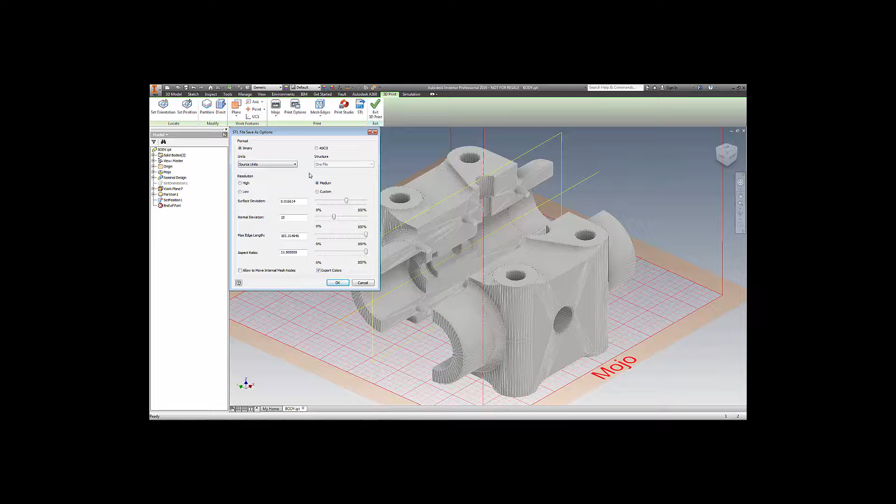Okay, so at this point I could have a look at the mesh display if I wanted to. I could also go into some print options and start to look at surface deviations, edge lengths, aspect ratios and so on. But what I'm going to do here is output it to Print Studio.

Now this is a technology preview at the moment. So let's just take a look at this. Again, you can see that we have various different machine beds and things in here. What I'm going to do is just show you the preparation that we can do with this.

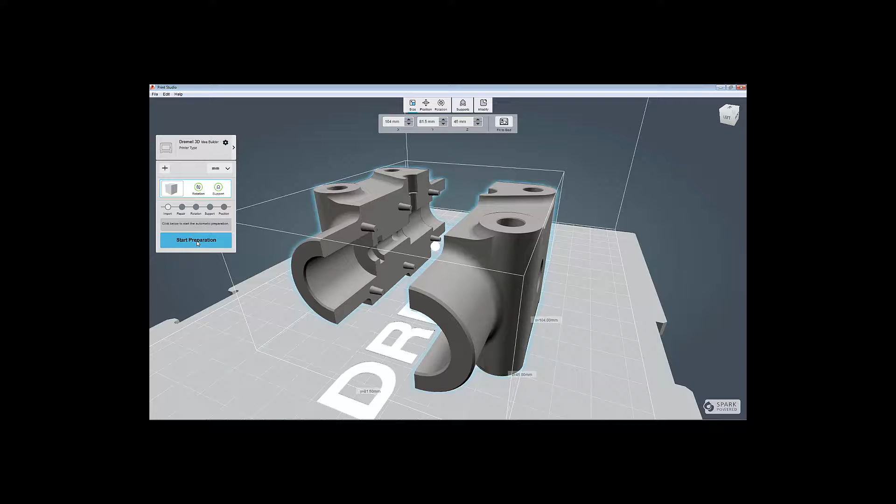So what this is going to do is now model up some supports for my particular component. Okay, so they're the supports modelled.

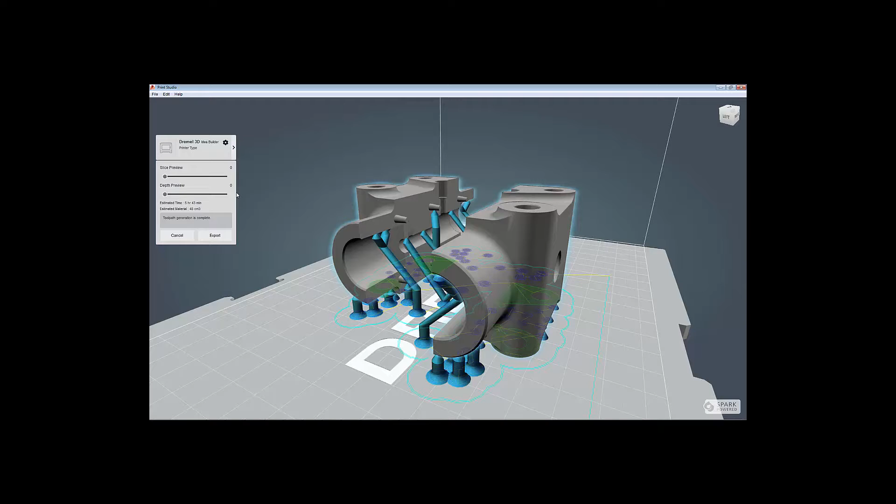Once we have the supports modelled, what we can then do is preview the prints. It just takes a few seconds for Print Studio to complete this task, and you can now see we have our layers completed. So what we can now do is start to preview the slices.

So as I drag the bar up here, you can see the product is now showing me where the slices occur through here. I can also have a depth preview as well in here.

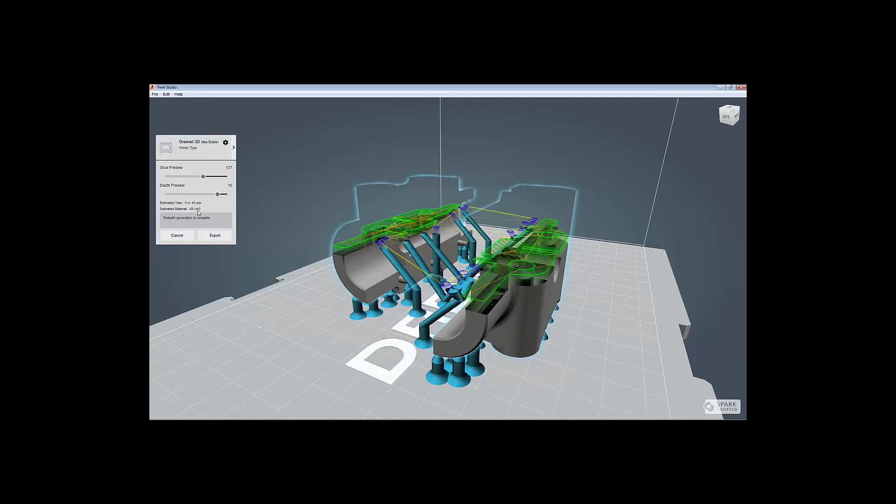And more importantly, you'll notice here that I have the estimated time of completion for manufacture, which is 5 hours 43 minutes in this case, and also the estimated material that the process is going to use. And of course the last step here is I can output this directly to the printer.